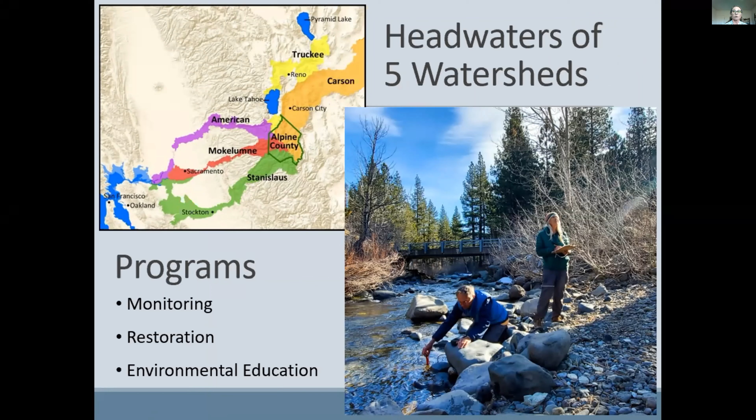As you can imagine, it's been a different year for our organization, and unfortunately, we will not be able to host our usual Creek Day Community Work Day this month. But we're very pleased that we were able to have our long-term river monitoring volunteers resume collecting water quality monitoring data last month. And Mo is organizing the next data collection for later this week with our core volunteers.

We've also been able to move forward with our largest restoration work to date, and that's bank stabilization at 2 sites in Hope Valley. That is scheduled to start construction later this month.

If you go to our website homepage, there's a flyer. If you haven't been to Grover Hot Springs State Park lately, the new ADA accessible trail is complete, and we are very proud of the new interpretive signage. So please go check it out.

Moving on to future projects, there are 3 projects that are going to be happening hopefully in the coming years along Markleeville Creek in downtown Markleeville. Caltrans is going to be replacing the bridge on Highway 89, and Markleeville Public Utility District will be upgrading the sewer infrastructure. And then at long last, our long planned for floodplain restoration project will be happening.

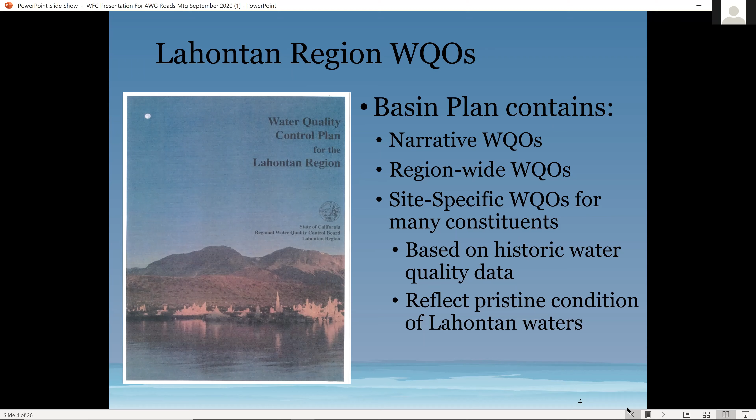If the data shows that the water quality objectives are exceeded or are not being met, we are required to place the water body on the Federal Clean Water Act 303(d) list. So if it does not meet the objectives, it becomes what we call a listed or impaired water. And if it meets the objectives, then we don't list it.

Once the water body is on the 303(d) list, we're required by Federal Clean Water Act law to address the impairment. This has often been done to date by developing a total maximum daily load, or TMDL, which is a water quality restoration plan. It can be quite expensive, resource-intensive, and can take a long time, because once the plan's done, it has to be adopted into our basin plan, which is a year-long process generally in itself.

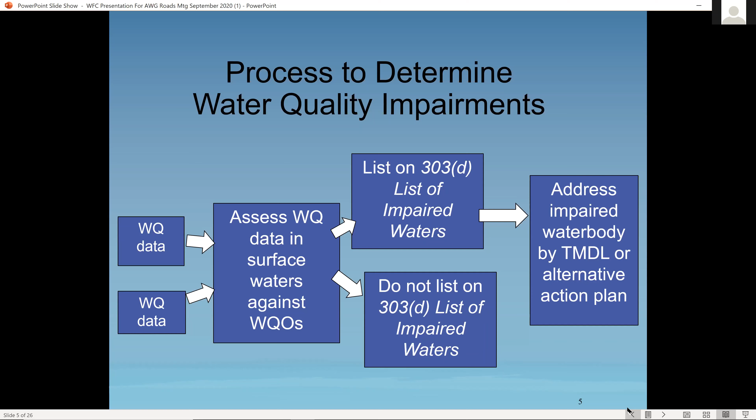When we evaluated in our most recent assessment in 2018 for West Fork Carson, we divided the river into three segments to evaluate the water quality based on existing common land uses. So what we did was split the river into an upper, middle, and lower segment. This is different than we've done in years past, but this is the most current method that we're using.

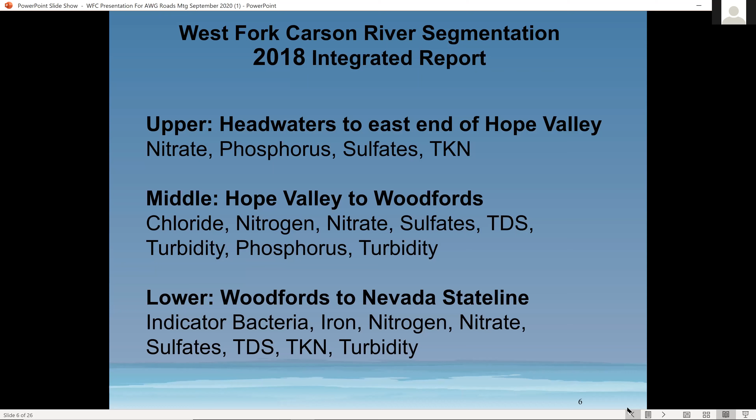It also results in low dissolved oxygen. Indicator bacteria, which the lowest reach of the river indicated was impaired, can have human health effects for water contact recreation, for example. And turbidity can have impacts to municipal use, but also to aquatic habitat.

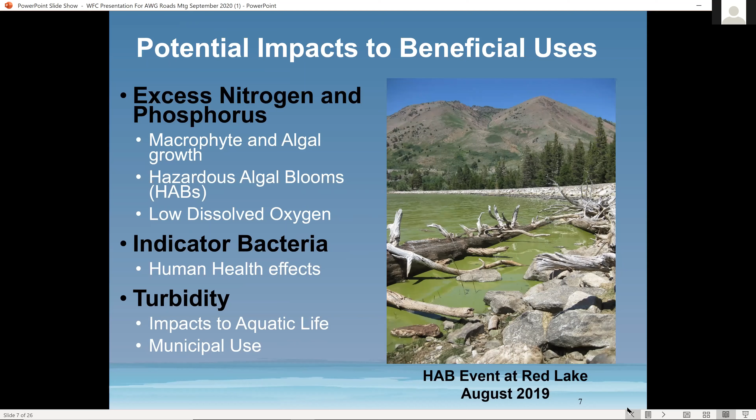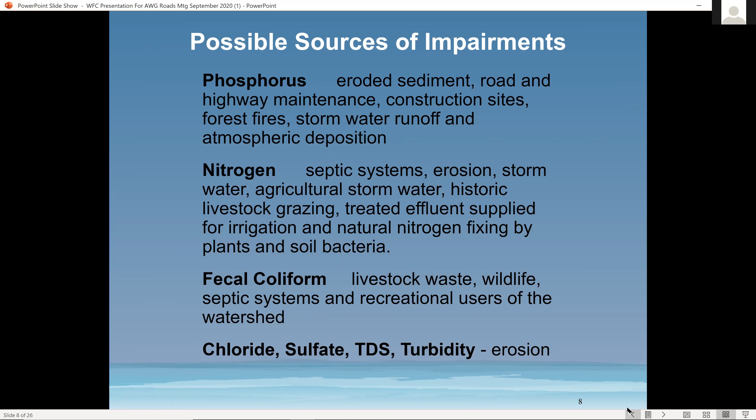So West Fork Carson is one of two watersheds in our region that we're using as our vision watersheds. The other one is to address bacteria issues in Bishop Creek.

So what is a vision project? It's a new term, relatively new terminology. It's been around for probably 7-8 years, that the US EPA came up with. And basically what it is, is an alternative to using a TMDL, but still getting to improved water quality.

It's a watershed-wide planning effort that focuses on improving water quality and can take, hopefully, less time than it would to develop, adopt, and implement a TMDL. A vision project looks beyond those traditional TMDLs and really focuses on collaboration with willing stakeholders to implement actions that can improve water quality.

There is, however, a backstop: once the vision plan is completed, if there are not measurable improvements in water quality, the US EPA can, in the end, ask us to develop a TMDL to address water quality.

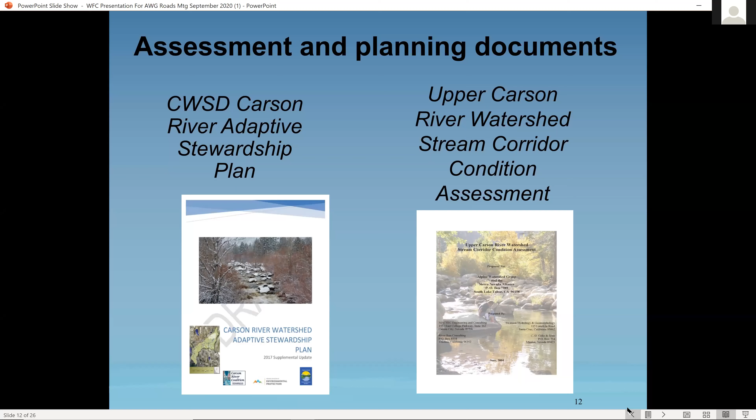Also, the Carson River Watershed Adaptive Stewardship Plan, developed in cooperation between the Carson River Coalition and the Carson Water Subconservancy District, is a very comprehensive watershed plan for the Carson River as a whole, in both California and Nevada, covering the West Fork and East Fork. However, there were some parts of it that did not have as much information for the West Fork Carson as we had hoped.

The US EPA considered the Conservancy's Adaptive Watershed Stewardship Plan to meet all of its 9 elements of a comprehensive watershed plan, but only for the state of Nevada. Once a plan meets this 9-element standard, it becomes eligible for technical assistance and different types of funding. So again, US EPA approved the plan, both its original 2007 version along with the 2017 supplement, as an approved plan for the state of Nevada, but not for the state of California.

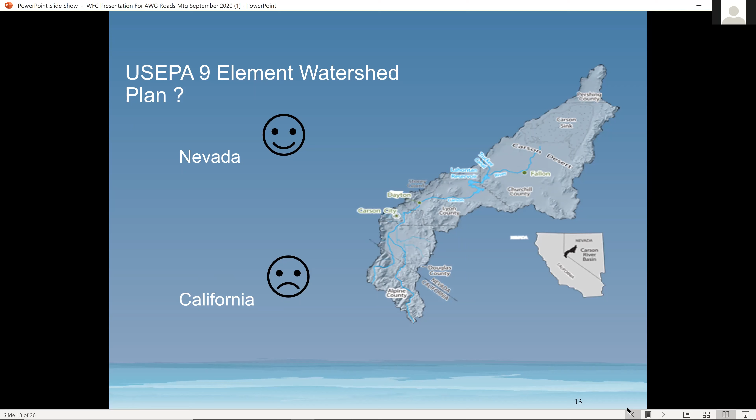So our hope is that in developing the vision plan, which will lay out a plan to address the impairments in the watershed, it will also meet the qualifications of a 9-element watershed plan. So the information we're planning to develop for the vision plan, along with what's already been developed as the Carson River Watershed Adaptive Stewardship Plan, will together be a 9-element plan for the West Fork Carson and potentially open the door for US EPA 319 grant funding.

Now, what I would like to do is switch over to Mike Hanks, who will focus on the many road crossings in the watershed and how we're evaluating those crossings as potential sources of impairment in the watershed. So, Mike, take it away.

Hi everybody, can you hear me? You sound good, Mike. Yep. Okay, great. Yep. Hi, my name is Mike Hanks.

I'm an environmental scientist at the State Water Resources Control Board, non-point source unit. I started helping Cindy and the Lahontan Regional Water Quality Control Board with some of their watershed characterization a few years ago, and eventually wound up helping develop a field assessment methodology to find sources of impairment at stream road crossings throughout the West Fork Carson River watershed.

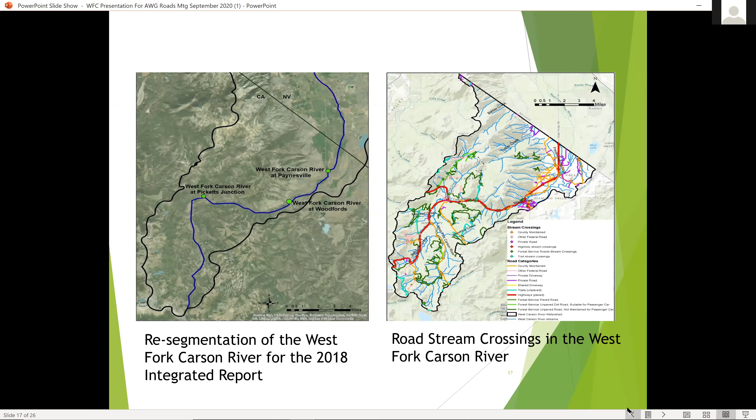We came up with field data sheets to take with us. These were developed by looking at methodologies using CAL FIRE's designing watercourse crossings for passage, 100-year flood flows, wood and sediment, Pacific Watershed Associates' handbook for forest, ranch, and rural roads, and North Atlantic Aquatic Connectivity Collaborative's stream crossing survey data forms.

In each of these forms, we wanted to note the site, location, when we were there, but also what kind of outlet we're dealing with—the shape of the outlet, the structure, the material it's made out of, and the dimensions, if measurable. Some sites were not safe for my coworker and I to go out and actually measure because of moving streams, so we could only sample some of them.

We also wanted to note whether or not outlets were armored, take stock of the inlet and outlet condition, the size of the culvert compared to the stream channel, and then a lot of notes on what was going on qualitatively at the stream road crossing, just because each stream road crossing is different.

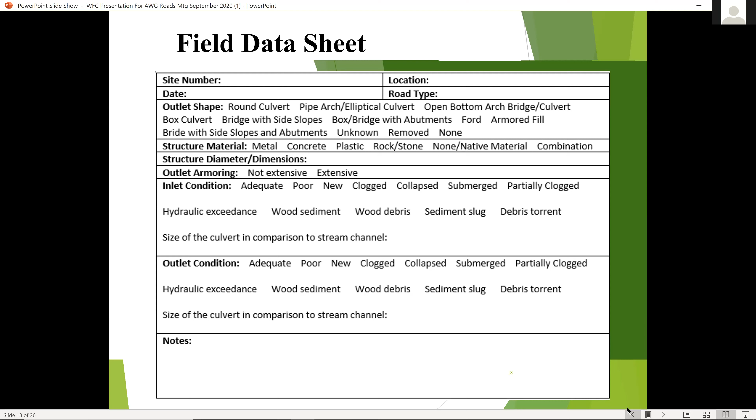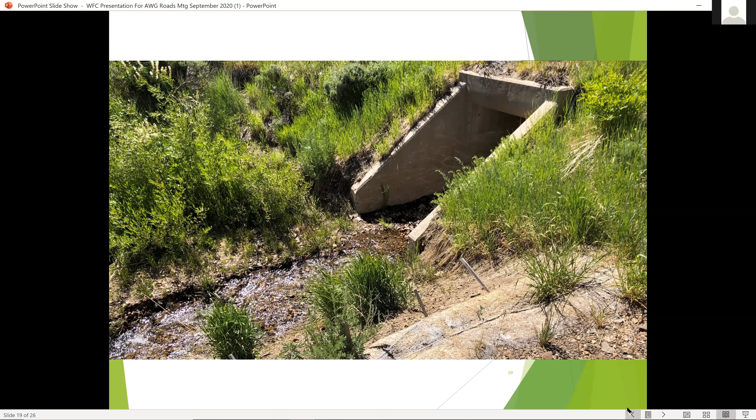This slide shows an example indicative of a lot of the stream road crossings we were able to sample in the West Fork Carson River. This one's doing pretty good—the box culvert looks adequately sized, the condition is good, and you can see on the bottom right-hand corner there are some baffles or walls, indicating the presence of BMPs to prevent erosion into the stream at this site. So we did find a lot of stream road crossings to be adequate qualitatively for a 100-year storm event.

But that's not the case at all stream crossings in West Fork Carson River. This circular concrete culvert, for example, has a lot of fill inside it, a lot of plugging, debris plugging as well, and even plants growing inside the culvert. If this culvert were hit by a 100-year storm event, we would question how successful it would be during that event and whether or not it would fail.

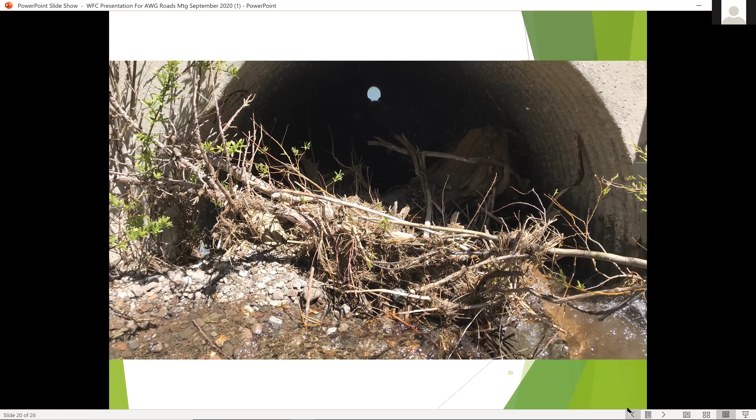To date, we've done about 80-ish stream road crossing assessments. We have completed all accessible highway and county road stream road crossings. There's a few county roads that are not accessible by vehicle or are fenced off. So everything that is actually feasible for us to do, we've been able to do for county roads and highways.

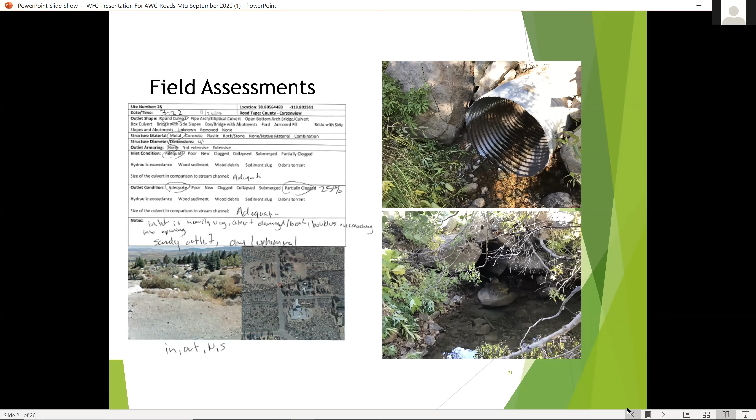We've talked a little bit about some of the qualitative indicators of failure—that's one assessment we're doing. That's what I was talking about earlier, whether or not a culvert might fail if there's a certain percentage of it filled with sediment or debris, if the culvert is damaged, or if it's collapsed or partially collapsed. We did note that.

But for the culverts where we were able to measure the dimensions, especially circular culverts, we're hoping to do a quantitative indicator of failure. We can do this by using the rational method or the revised USGS regional regression equations to determine nomographs for culvert sizing, to determine the appropriate culvert size for a 100-year storm event.

In layman's terms, you get what the precipitation would be for the area during a 100-year storm event. You take the size of the culvert found in the field, and calculate the upland flow of water at that point, to see whether or not that culvert would be appropriately sized.

We are still working on this part. Due to COVID-19, we have yet to be able to go out and assess forest service roads and trails. Also partially due to COVID-19, we've had staffing reductions and furloughs for our staff, so we have yet to complete this section of the work, but we hope to do it soon.

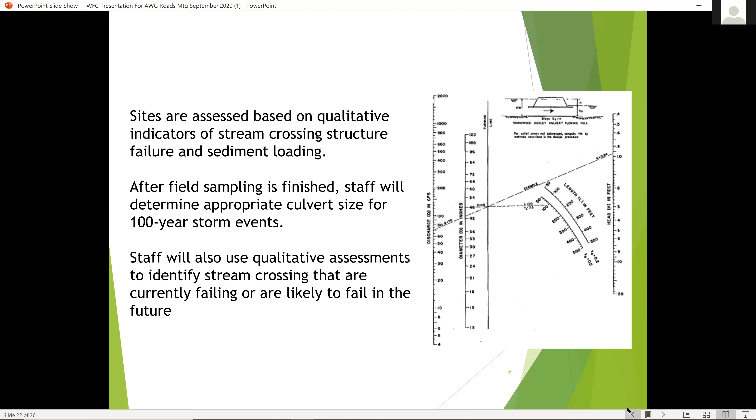So far, without showing you all the data we've collected, I think this is the easiest way to communicate our results so far. We've found 21 stream road crossings in the West Fork Carson River watershed that would be at risk for failure during a 100-year storm event. This is only based on the qualitative data we were able to find in the field.

Many or all of these sites, which are distributed throughout the watershed, would probably have something going on with them where either the culvert was collapsed, partially damaged, plugged with sediment, plugged with debris, or plugged with vegetation growing in the culvert. Each of these has been marked as something to look at for potential failure.

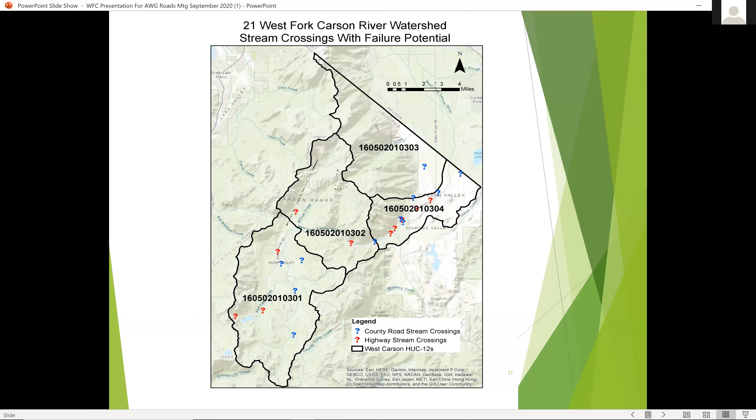And I think that's my last slide. I'm going to hand it back over to Cindy, and I think she's going to finish this out.

Cindy, I think you're muted. Sorry, I was trying to unmute here. Yeah.

Thanks, Mike. I just wanted to touch quickly on some of our other efforts that we have been doing in the watershed.

Mike has helped us out with a lot of land use mapping. We've also been cataloging different kinds of management measures that are either completed or underway. One example is the local area management plan, a signed agreement between our board and Alpine County, which will look at septic tank development and potential impacts, a good way to look at potential impairments from nutrients and maybe bacteria as well.

There's also a lot of restoration work that is completed, planned, or underway, and that will be the focus of our meeting in November that Kimra talked about.

There's also been some very focused public participation: this meeting tonight on roads, November will be focused on restoration, after that we'll look at recreation and then potentially ranching as the fourth public forum on the West Fork Carson Vision Project. We've also developed a website and an email subscription service, which you can find at the link at the bottom of the page.

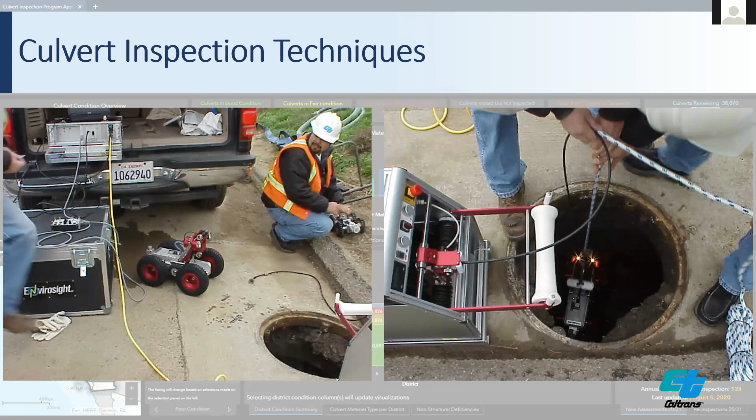Some of the inspection techniques, if you can't reach it, we've got to find other means and methods. One of the methods we use is rovers, or robotic cameras. They put them down, like this going into a storm drain manhole. They push them through and inspect the culverts.

We get photos like these, and these are some of the damages we may see. Most times the guys are down there shining a light, looking down, trying to look for joint misalignments or rotted inverts or piping, or whatever the failure may be.

Sometimes they'll puncture through culverts, and that may not seem like an issue, especially if the culvert's not running at full flow. But that soil can come down, and next thing you know you've got this big triangular section of road pulled in through the culvert — what we call infiltration — and then it collapses the whole road and jeopardizes the structural integrity.

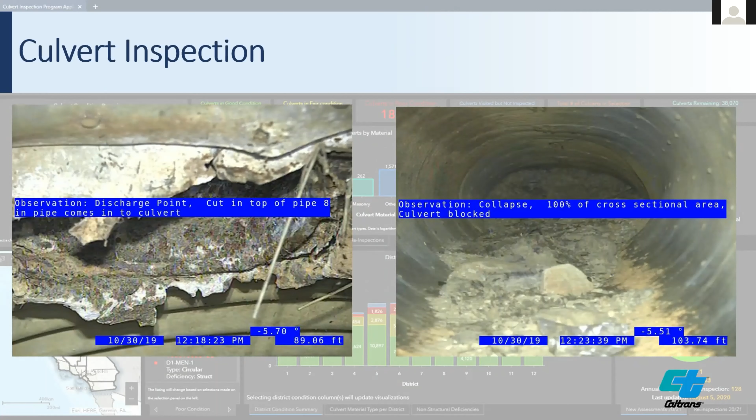In that culvert process, it goes through us, and then we look at, okay, what is next? Even for bridge replacements, culverts, anything that a road goes through within state right-of-way, we have to go through this big strenuous list of different things to check.

One of the major ones for big streams is hydromodification. We do not want to change the natural flows of the channels — that is our critical thing. We always try to mitigate runoff where we can.

So we look at the existing conditions and then see how the project is going to change or affect it. And if one acre or more of impervious area is now draining to this channel, we have to do a rapid stability assessment, or RSA.

The RSA says, okay, you've done your due diligence, and you have to discharge in this channel — okay, what are the effects to the channel? So then we have to look at the threshold drainage area, the TDA, defined as the area draining to a location at least 20 channel widths downstream of the crossing.

So if you went from top of bank to top of bank, that's one width. You go 20 times that, and we see the total effect on the channel. If you get any head cutting or some sort of bank or bed erosion, then most definitely we'll have to mitigate that one way or the other.

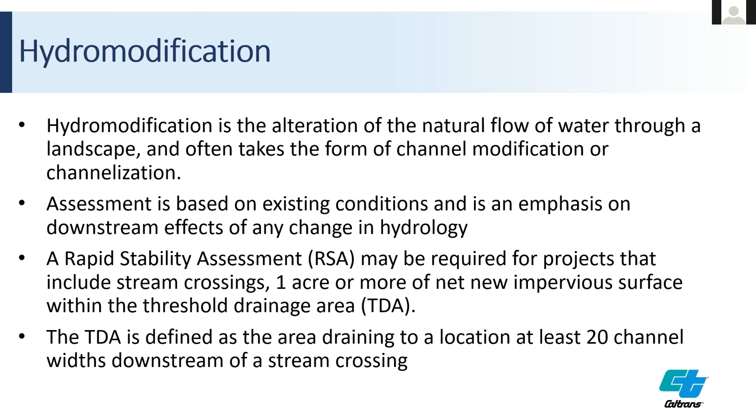For culverts, we typically design for the 10 or 100-year frequency storms. For major freeways like 99 or I-5, big ones that get major traffic, then we'll look at the 25-year. It has to pass the 10 or 25-year, and it can't overtop at the 100-year storm event.

That means on the inlet side, it's typically always submerged — there's always going to be a headwater, which gives us a little more room for wiggle. What we really like to look at is the outlet velocities, any deep debris flow, and how maintenance will take care of this culvert.

So maintenance now, with all 12-inch culverts, they need to be upsized to an 18-inch minimum because they can't get a Vactor truck in to clean them out. And like Mike pointed out, there was a big debris buildup in that culvert, and maintenance needs to make sure they're on top of that — because if a 100-year storm hits and our culvert washes out, that's not a minor issue. That whole road is gone.

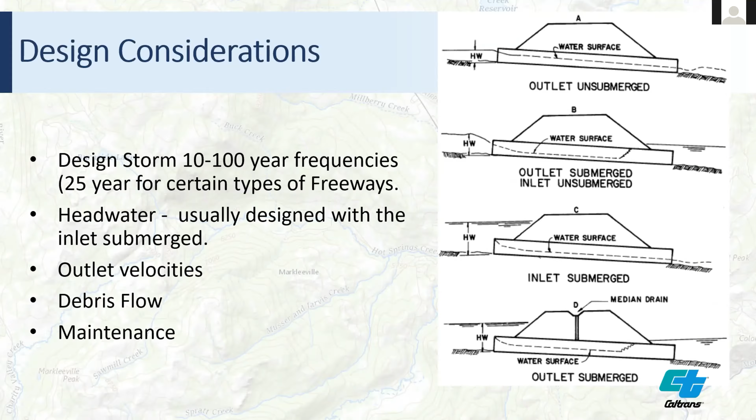And if it's a major road like Interstate 5, that's detrimental. So we need to make sure we're on top of maintenance and doing what we can to have an efficient system. For clean water, there is the Stormwater Best Management Practice Handbook.

It pretty much gives you a menu of items you can use to have cleaner water discharged into the natural ground, the channel, or stream, whatever it may be. There are different means and methods, and I've listed just a few of them. In the mountain counties, where they're de-icing and using salts and sands, at the drain inlets we'll try to install sand traps.

Sand traps are pretty much just a standpipe with an elevated outlet pipe so that you can trap some of those large sediments and bypass the clean water. Otherwise, other things are infiltration or retention basins.

Sometimes we use detention basins, and there again we have to catch that first flush, as they like to call it. It's that first inch or two of water that's carrying all those sediments and oils down. We try to capture that before it runs off.

Typically, if we can't retain two 25-year storm events for a 24-hour time period, then we have to have at least a bare minimum of the water quality volume, which is the 85th percentile of a 24-hour normal storm event. I know it's a lot of mumbo jumbo, but this is pretty much saying do the bare minimum to make the water discharge a higher quality.

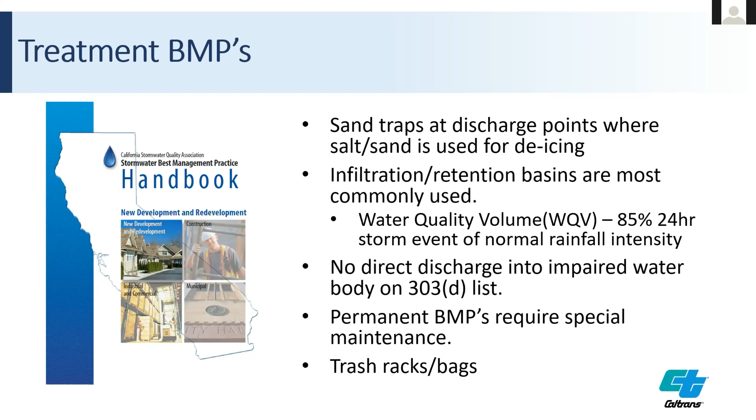So for high debris flow, that's going to come down and it's going to plug that inlet. We're going to have that trash rack to kind of disperse it from getting lodged in there. Maintenance can clean it real quick and still allow water to go through.

Trash bags, on the other hand, are mostly used in urban settings where you're getting a lot of trash flow into the storm drain lines. And then at the outlet, these bags capture the trash, and the maintenance crews can pull it out and then dump it as necessary.

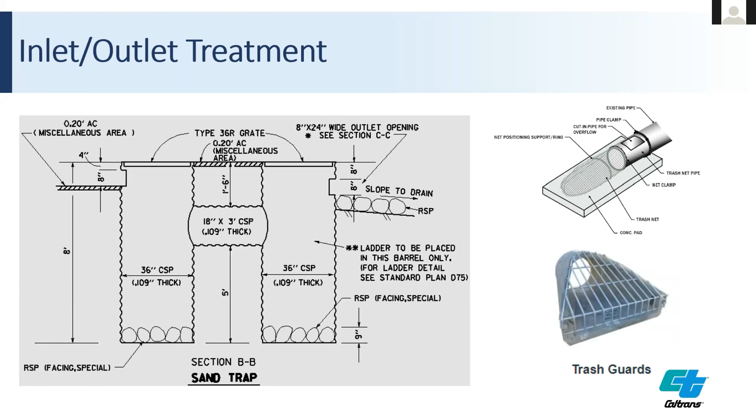So, retention and detention basins. I get it confused. The way I think about it is high school: when you have detention, you're not there forever. So detention basins are short-term, retention basins are long-term. They're good ways of cleaning water if you have the space.

They also control flood flows. So with detention basins, even though they do not retain the water for percolation into the ground, they allow direct discharge. What we'll do is put an outlet pipe that's elevated, similar to that sand trap, and it'll have a controlled flow outlet, reducing your flow so that you don't overwhelm your downstream location. That can be implemented in a portion where we have to do an RSA.

These basins are large and wide, and they promote evapotranspiration, infiltration, and then grassy swales and biomedia treat any particulates that go down onto the ground.

The water quality volume needs to be a minimum of the 85th percentile of a 24-hour storm event. For vectors, for mosquito issues, we try to promote a 72-hour drawdown. Otherwise, we say 96 hours maximum, and you need concurrence from the local vector control. They'll need to come up with a spraying plan so we don't just breed mosquitoes and wreak havoc on the locals.

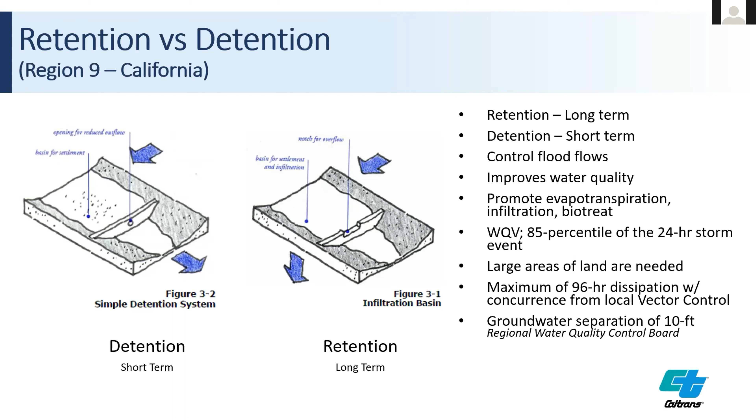So downstream, the outlet velocity is very critical because if you design a culvert improperly, you could have high outlet velocities. High outlet velocities cause turbulence and eddying, which erodes that outlet soil, and that soil gets taken downstream and possibly into the channel. Sediment itself is a pollutant.

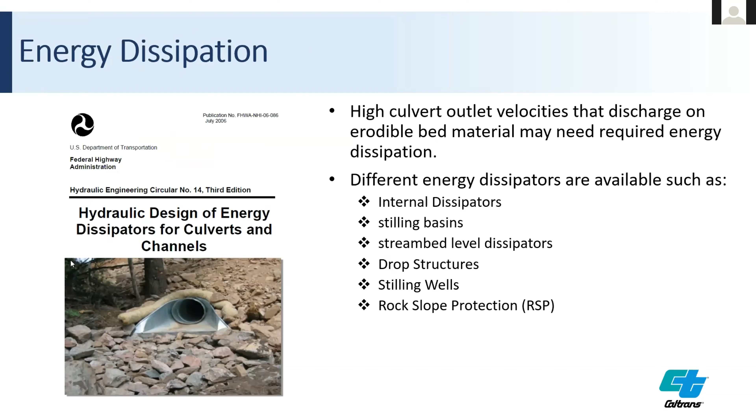So we look at all aspects and try to make sure we're doing our part to really improve the water quality. Some outlet energy dissipators are stilling basins, drop structures, stilling wells, or most commonly we use flared end sections or rock slope protection. Those are the typical things we use based on the outlet velocities.

Some of the temporary BMPs, like during construction activities, are wattles. We try not to leave those long term, but if the RE doesn't push it or the contractor doesn't pull them out, sometimes they're left behind. But truly, they're only a temporary solution. If they're left behind, it's not a huge deal if the plastic netting is biodegradable.

Gravel bags to protect DIs, filter fabrics. During construction, we use truck debris racks, truck wash racks, or heavy rock. At those locations, they drive over them, and we try to knock down any foreign soil so it doesn't get tracked all over the roads and eventually deposited into the local channel.

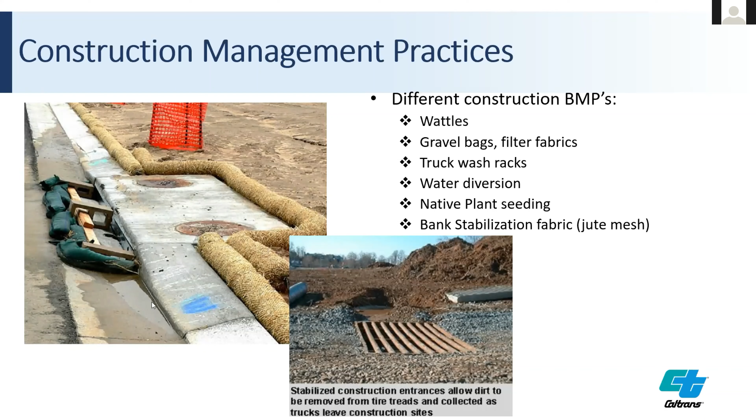And then for bank protection, to reduce the chance of slope failures and erosion due to rainwater runoff, we try to plant soil seeds or use filter fabrics to help hold back and retain that soil. That's kind of in a nutshell what we do.

But some of the lessons learned from the projects I've been involved in, I'd like to share with you, really helped open my eyes up to how to improve.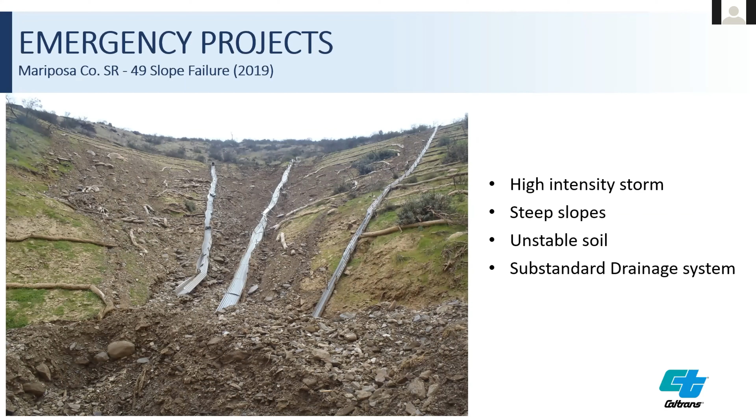Unfortunately, or fortunately, I wasn't here during the rock slide on Mariposa 140 on the way to Yosemite where the bank failed, but I was involved in a slope failure on Mariposa 49. Here we did not have proper drainage. Upstream we had rolled dike and loose material which clogged all the DIs, and the water just poured over the top of the bank. Even the down drains we had were poorly designed and did not adequately retain runoff downhill, causing major erosion. Although this isn't directly involved with water quality, since it was right next to the channel, it most definitely impacted the local stream.

So what we did here is we wrapped the whole bank in a jute mesh, like a burlap sack material. It helps promote seed growth and retains those plants so they can push roots in and really hold back the soil. On top of that, we used chain link fence as well as circular culverts. You can see before there were open-ended culverts and they got all beat up. These circular culverts are a little stronger, can withstand more flexibility, and do their job properly.

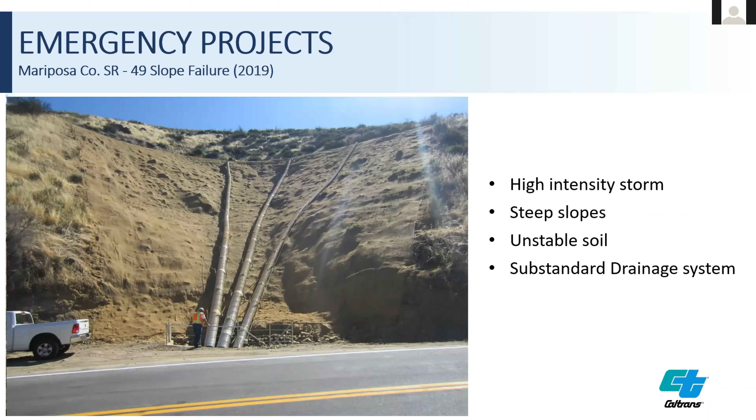Again, this is another photo of that chain link fence held back, retained with soil nails, and then our down drains.

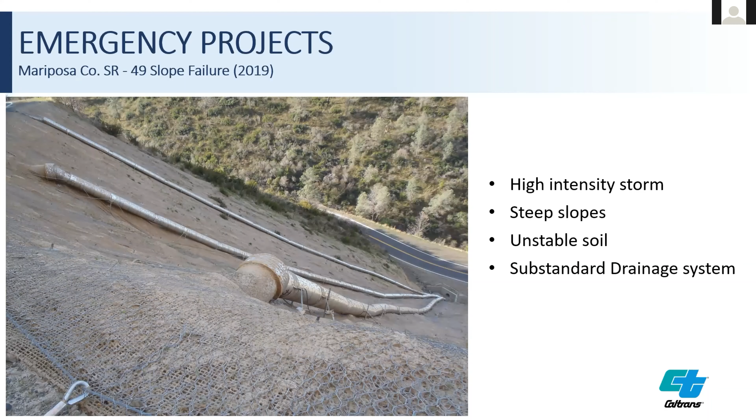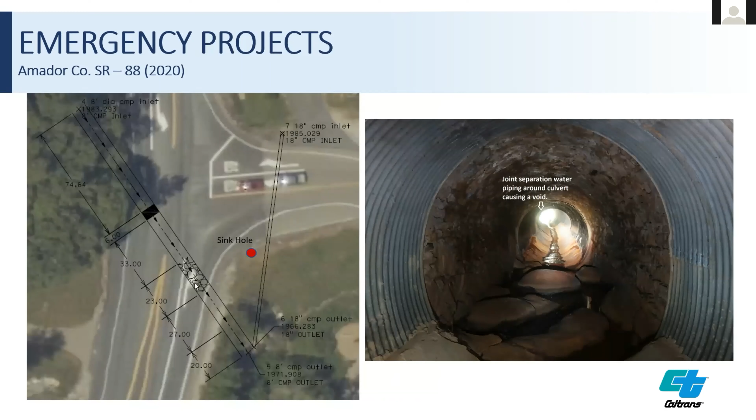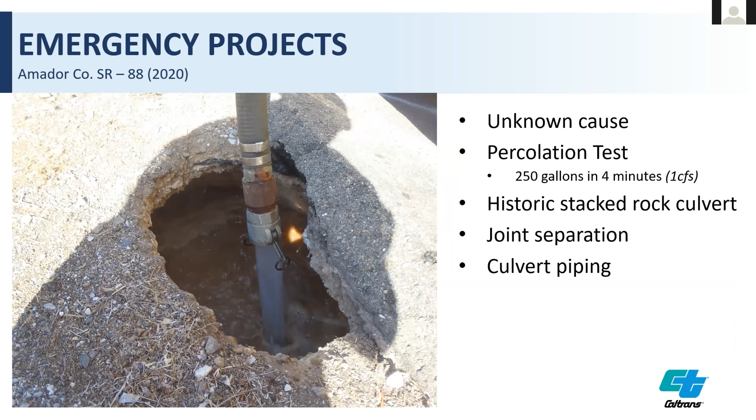We inspected it. So we decided to do a percolation test. We dumped 250 gallons of water, and it shot through in 4 minutes. And we went down into that rock stack culvert, and what do you know?

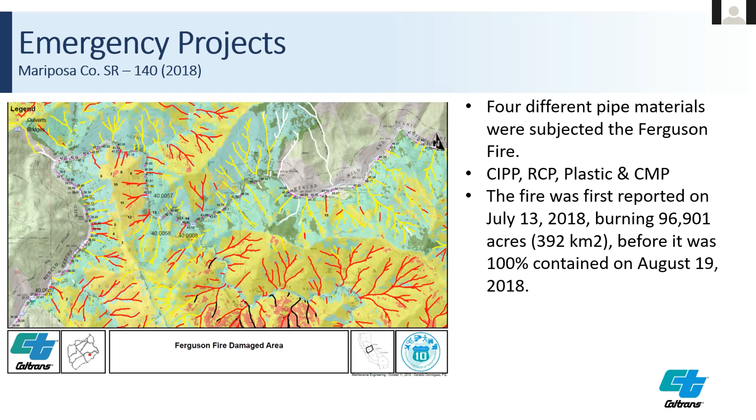And lastly is the Ferguson Fire. That was a major issue, because after a fire, and a heavy storm hits, you're prone to mudslides and big debris fall. So we worked hard to try to account for that debris. But what we didn't account for was the damage the fire does to the existing culverts.

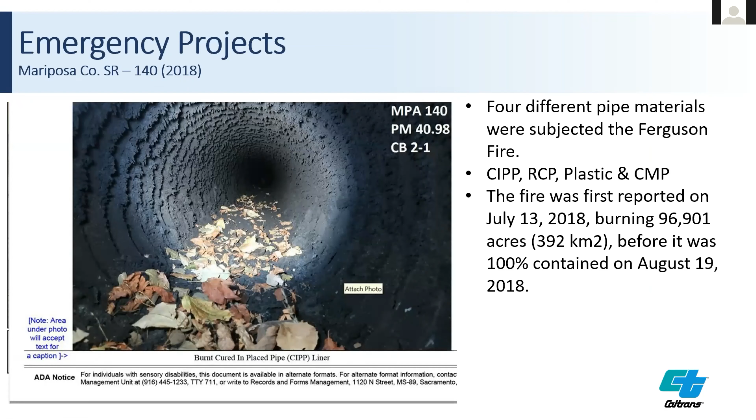Now, this was a plastic-lined culvert pipe. It was originally a corrugated metal pipe. It was lined with a plastic liner, and it wicked through, so that once it caught fire, it burned all the way through. And once it burned through, it produced a byproduct, this nasty chemical stuff. And this was right off the Merced River. If we had those plastic-lined culverts everywhere, I couldn't tell you what that water would be like.

But just going on different culverts, this was a RCP, a concrete culvert. Looks the same as it did before. So thumbs up to that.

This is another plastic culvert. These do not do well in forest fire prone areas, so we try to eliminate those. Again, this didn't get wicked all the way through and produce that nasty byproduct, but this one did have a structural integrity issue and collapsed.

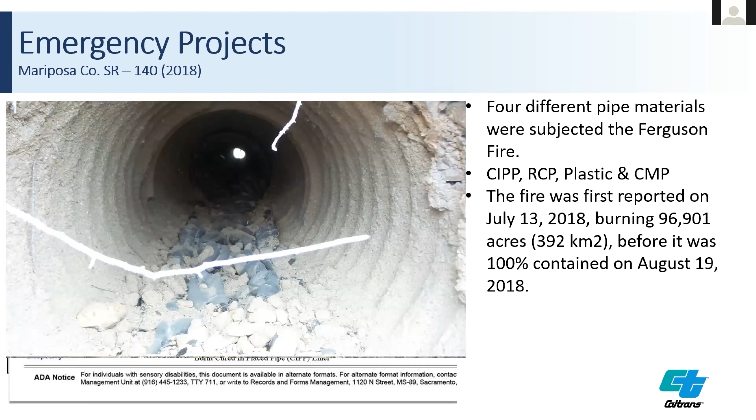And lastly was the culvert pipe, the CMP culvert pipe. In decent shape, they just don't last as long as the concrete pipes.

So all in all, this is kind of what we do in regards to water and Caltrans and how it affects our roadways and how we go about it. I'm just learning, so always room to learn. But if you guys have any questions, I'm open for that.

Don, I guess my question is, going back to your initial slide on your progress on assessing culverts, is there a system in place where that information feeds to the regional board, or how would that work?

And does anyone else have any questions?

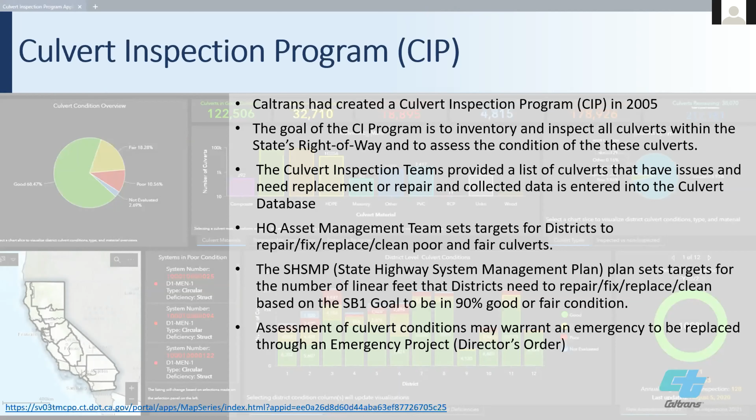Okay, Don, thank you so much. That was very interesting, and I really appreciate you translating engineer speak so that I hope everyone could understand. I definitely got a lot out of it. Yeah, I did my best, sorry. No, you did a great job.

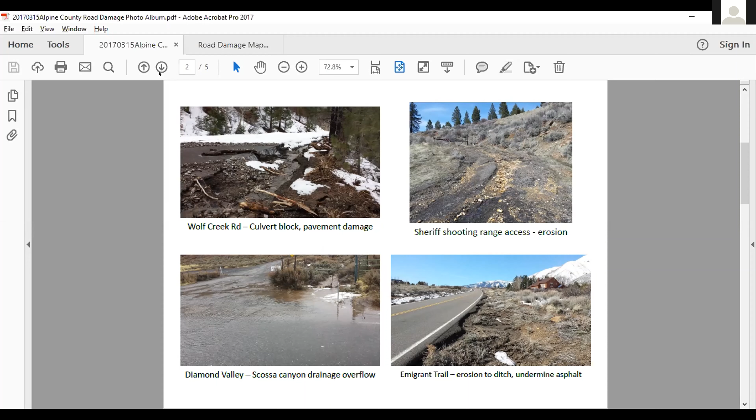Go ahead with the next set, and you'll see similar things. Because it's very practical, I can just go out and send these photos to the county engineer, who's not local. I have to use things like a hat to show the significance of the damage, or roads like the airport road example, where once cutting starts into the road surface, you're lucky to get it stopped at that point and keep the road passable.

So this has been the condition of the roads in the recent past, because damage that looks so small in these photographs can take a week with a whole crew to repair correctly. And as we flip through here, like I'm saying, these are just the highlights — it's not everything that was required of the road department to get fixed.

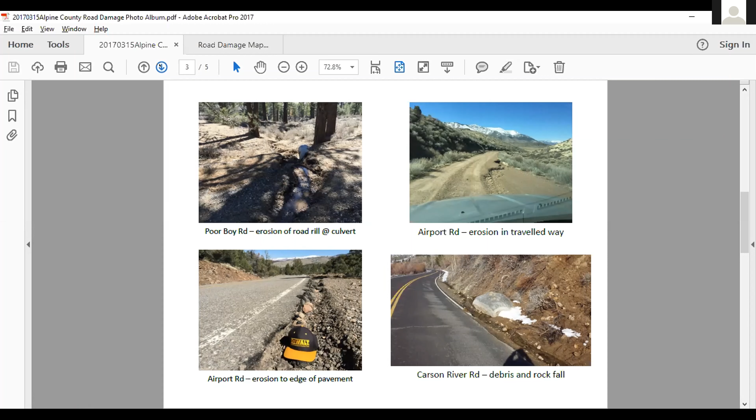So safety is always the number one priority for the road maintenance function. The point of the whole transportation system is to move people and goods, and if it fails, the safest thing to do is close the road. That's where this becomes practical application, because if there's not enough resources to do the maintenance, or if you have significant damage to the extent you can't repair it, you're talking about closing the road.

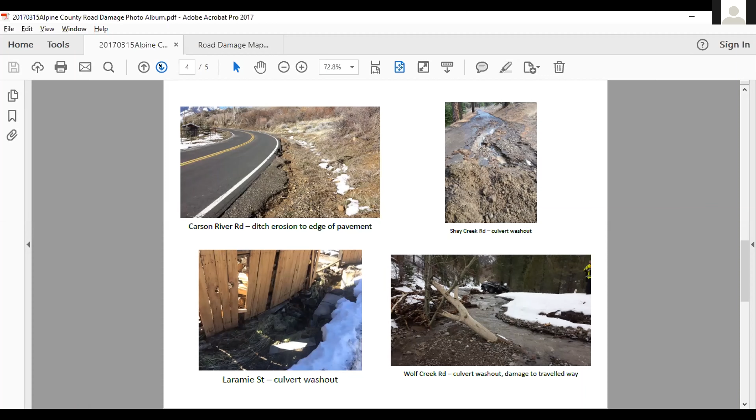And I guess I've got one other greatest hit here. Same with the FEMA repairs for that section of Airport Road in Diamond Valley. We're also doing some repairs on Hot Springs Road, as well as a full reconstruction of that road eventually, so many of those drainage problems and slopes, like you see in the upper right-hand corner, will hopefully be repaired. But the reality is funding for road maintenance and construction just won't keep up. So you're always going to have situations where you're looking out for a blocked culvert, like in the lower right-hand corner on Diamond Valley, just to get crews out there in time to avoid worse damage occurring.

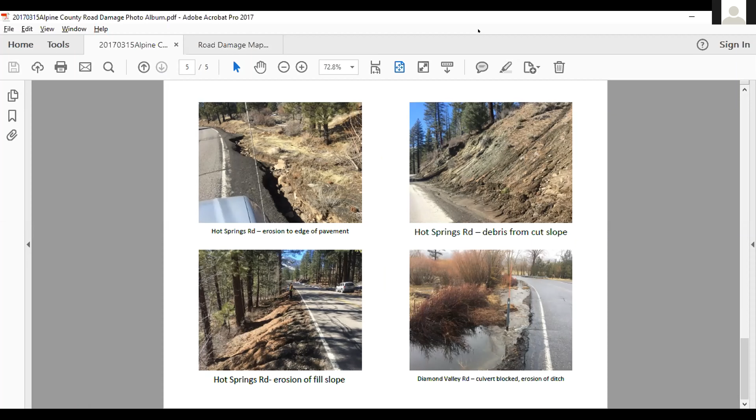So that's kind of the short and sweet of it for me. I'm sorry I couldn't share the other images that I have, but I can send those around to anyone who's interested.

Thank you, Zach. Does anyone have any questions for Zach?

Maybe this is for Cindy—Zach, if you could send the other images to her, she can distribute them. I'd love to see them, and I'm sure other people would too.

Yeah, and what we have with the inventory info that you guys have prepared in Caltrans is just an inventory of the locations. So we have geodata that shows where these culverts are with some attribute information, but we haven't really been able to do the assessment and the judgment of: is this in good condition, is it in fair condition? Because we're benefited by, and also cursed by, having road department people who've worked longer than I've lived, so they carry the atlas and the conditions around in their fastest computer, between their ears.

But that's also a problem, and one of the reasons we understood we needed to record and get more information, because eventually the same system we saw from Caltrans, where they do annual inspection and base their work program off of it, is something that will have to happen here, when it's just not as intuitive as someone who's been doing the job for three decades.

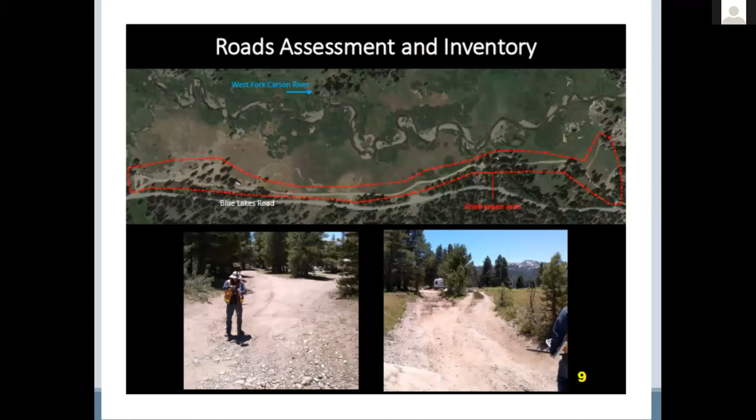And that's all that I have this evening. Are there any more questions, comments, or ideas for Cindy, Mike, Zach, or anyone else?

From CWSD's perspective, this has been awesome, and it's really good to see all the work that's being done. I appreciate it for the vision plan and by you guys.

Thanks. I see that Rich Harvey has his hand up. Do you have a question, Rich? You have to unmute yourself. Oh, sorry, I was muted.

Rich Harvey with the Watershed Group, I just want to thank you, Kimra, for putting together a really interesting presentation. I learned more about culverts and drainage and all the roads than I ever knew before. I want to thank all the presenters, thank you so much, and Don, it was very interesting to me, great stuff. Thank you.

Thanks, Rich. I look forward to figuring out how our staff can really support the regional board and the state board. We don't need to be the nag, but I know Brenda for many years now has been trying to get things moving forward so that 319 funding can start to flow. Cindy, I really appreciate you trying to find that door and open it for us. I think the most important thing is that we find the priority projects where we're going to get the most bang for our buck, especially as dollars become harder and harder to come by, and I think that's the era we're heading into as we get past COVID-19.